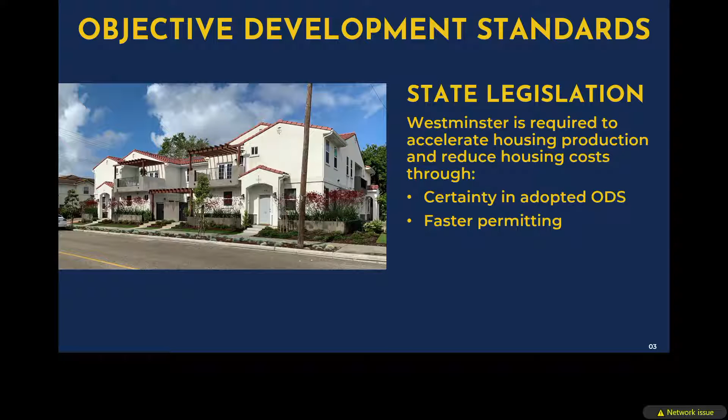That is, provide what we call certainty in adopted ODS, essentially identifying the rules of the game, so the developer, the community, the residents all know what is expected from a development submittal. Then the other part of this is faster permitting. Often the process takes a long time, so are there things that could be done to cut the permitting period so you get more housing quicker?

So the next question is, why do we need objective development standards? Well, the problem is today there is nothing to evaluate projects in an objective way. So what the city has today is a series of subjective design guidelines or just a limited amount of code.

That is very, very ambiguous. It is recommendations, it's discretionary. You can do this, you might want to do that. But it isn't something that has the force of law. And as a result of that, that subjectivity often results in inconsistent interpretations because it's a he said, she said, my idea, your idea, I don't know, let's talk about it. So it becomes very much an iterative process, and as a result of that, prolongs the process.

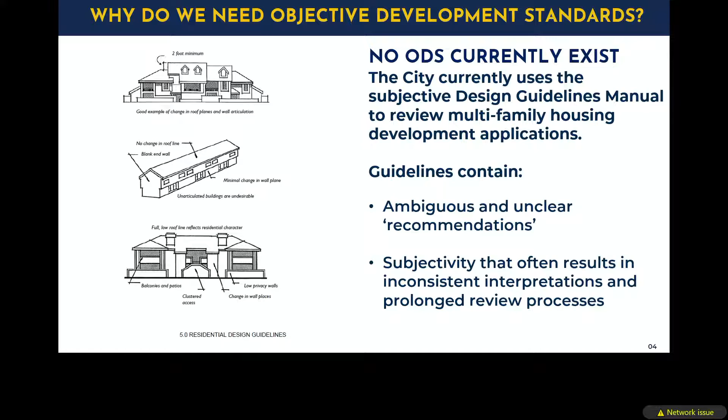So we want to get away from recommendations and subjectivity and create development standards that are objective, that offer no gray area. It's black and white. Either you do it or you don't. And these requirements are shalls and musts, and they need to be measurable and verifiable. So there are dimensions, heights, width, colors, materials, those sorts of things. And the idea here is not to layer more regulations, but to distill this down to the fundamental things that are required, and then allow some flexibility where it doesn't matter. Because just adding more and more regulation doesn't make anything better. So we need to find what are the essential things you want to regulate, and allow flexibility for everything else.

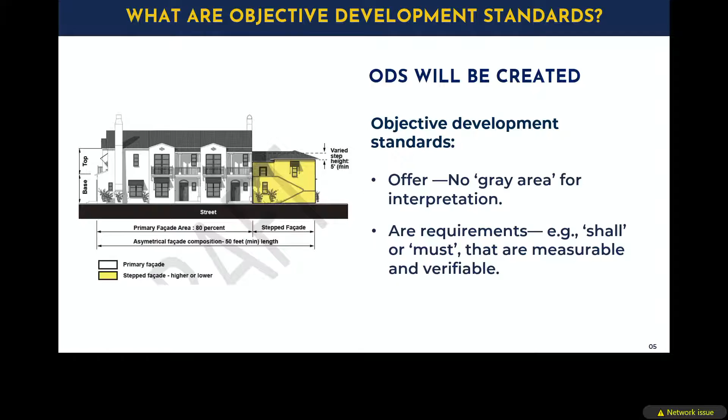All right, so where will these standards apply? Well, first of all, it's not going to apply to single-family homes, residential development that is already there. It's not a remodel project, it's for new development only. So if it's a new project in the MU, which is mixed use 36, and MU 40, mixed use zone parcels, and those are mostly along your major corridors, Beach Boulevard, Westminster Boulevard, Trask, the other bigger roadways. So that's where most of that is targeted.

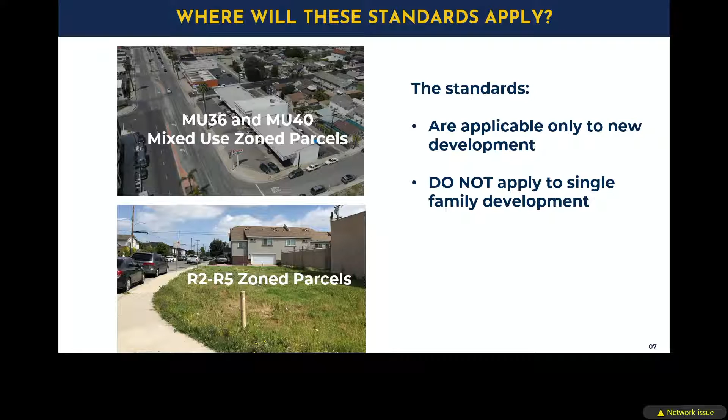And then there's also standards that are going to apply to your R2, 3, 4, and 5 zones. So those are your townhomes, condominiums, and maybe some small apartments that are mostly infill into your neighborhoods. There might be some as part of the corridors, but generally they are in the neighborhoods, all right? And so what we want to make sure is those in particular are good neighbors, so that they take into consideration the context that they have along those residential streets.

So what are the benefits? There are good things that come out of this. For the developers, the development application review process will be streamlined. As we said before, we're going to cut that back. And as a result of that, because we're architects and we work with developers, we know that when we sign a contract, one of the things we have to figure out is what's our fee. And if there's no certainty, our tendency is to charge more, simply because we got to build in this redundancy of meeting again and again because we don't want to lose money. So that, as a result, increases the cost of housing, because they'll pass that on, the developer will pass that on to the project. And so that money saved with the reduced processing time will be helpful.

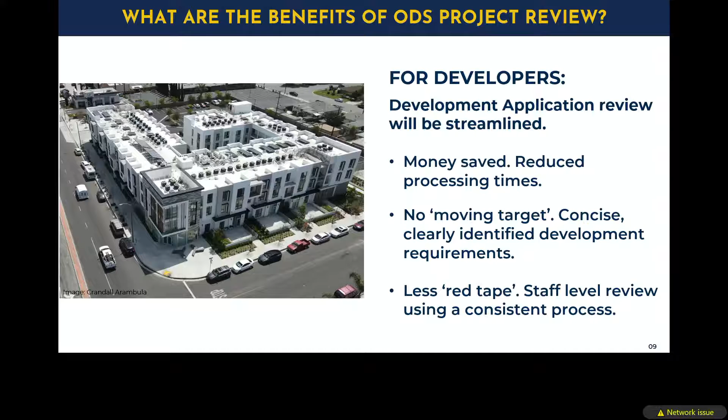The other one is there's no moving target. So if I'm an architect and I represented my builder or my developer, I know what those standards are and they're clear, concise, and easy to understand. So I know what to do and what to respond to. And finally, as we said before, there's less red tape. And because this development process will be done at a staff level, it won't be done by the Planning Commission, it won't be done by City Council. And this is by mandate from state law.

All right, so what do the residents get out of this? Well, first of all, the biggest benefit, you're going to have more housing choices, and that is a fabulous thing to do. And because you're involved in the process, you have the chance to weigh in on what the values of design should be. So you get the predictability of design that are based on the community's values. They're not imported from Portland or Pittsburgh or some other place. They reflect what the residents of Westminster want.

And then there are other small things, like we call public accessible amenities. Wider sidewalks, more street trees, more benches, better lighting, and other things like that that might be part of the development as part of the standards.

Because we have a lot of mixed-use development, we want to set the stage so that the development, if it has a shop and an office building, is economically viable. What we find is a lot of development standards aren't. The requirement for things like ground floor commercial doesn't work, and they end up being what we call a ghost box—retail spaces that no developer can fill, and become a blight.

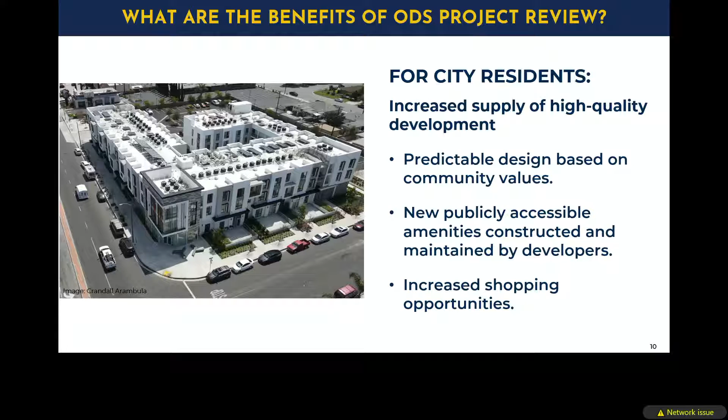So we don't want to see that kind of thing. We want to be very cautious about the mixed-use areas, only locating and requiring it where it will work. All right, enough of that—let's get into the meat of this. So we've got to create the ODS. What goes into that objective design and development standards?

So here we are, providing input—we're really the beginning step. On the left, you see we've got a contract that started a year ago. Most of this was gathering information, evaluating existing regulations, getting a better sense of the lay of the land. We've met periodically with Alice and Steve and staff to get a better sense of what you have in your code and your design guidelines.

Once we get into this middle part, which is creating the ODS—what we're talking about today—we've met with the development review team, who gave us input on March 15th and April 1st, and then we're going to have a series of public meetings.

So we're having this meeting tonight. And we know on June 17th a lot of people can't make it on a weeknight, so we're going to have another meeting, and we invite everybody to come again. There's nothing wrong with chiming in twice into a community meeting. That one will be 2:30 to 4:30 on June 17th.

We're also going to have some invited stakeholders—people who have a property or may express interest, a developer, an architect, others who are actually going to go through the application process—and we want to talk a little bit about that as well, and also update them on what we've heard from the community.

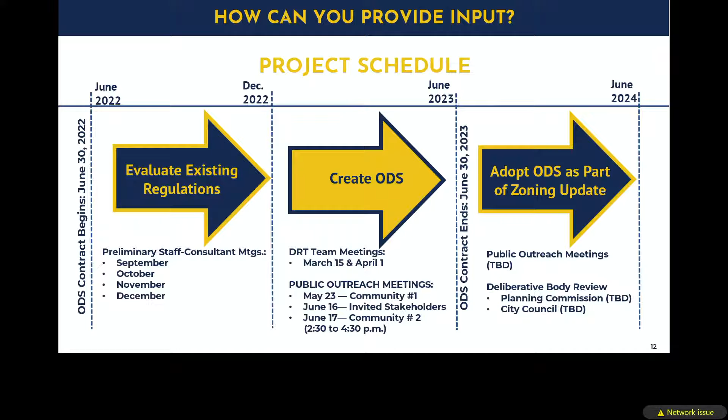The second piece is the site development—think of it as the placemat that, number three, the building goes on top of. So these are broken into three distinct areas with standards that regulate them: the edge, the mat, and the cup and saucer, if you will.

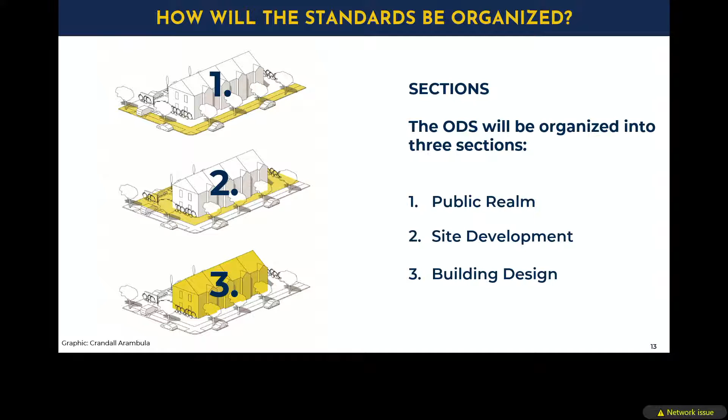Let's talk about those public realm improvements—this is generally what we're looking at. This is a street just off Westminster Boulevard, a side street. We're imagining, this is not definite, just for instance—if that site were to redevelop, we'd expect to see that perimeter, that collar, have these things: widened sidewalks, canopy street trees, shrubs and ground cover, ornamental pedestrian-oriented lights about 15 feet high, lighting the sidewalk, not the roadway—this is for pedestrians—benches, bike racks, and other street furniture, all the things that go along with that.

What we are anticipating, because we want wider sidewalks, is that the current standards for the city—the sidewalk—are very narrow, and frankly, it's substandard.

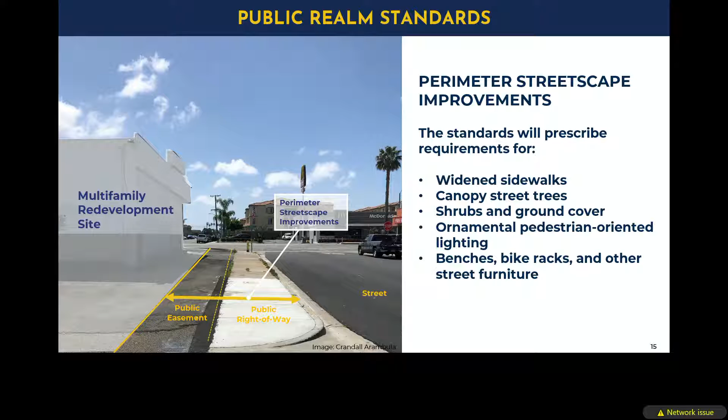So we're going to ask the developers to allow this area for perimeter landscaping improvements. In turn, because we're taking some possible development area out of this through the rezoning process, we want to revisit setbacks so the developers have a larger envelope, so the setbacks are less to take into account. We'll show you some examples of how that might occur.

So let's talk about why it's important to think about the public realm issue. Because this is about multifamily development, and we find the people who are living in multifamily development, not only in Westminster but around the country, are people who may not own a car, may be transit dependent, may be handicapped, elderly, or children.

You want them to have the ability to walk to a grocery store, to school, to their job, and not fight with everybody else to find a parking space wherever they're going. They need this. So this is about equity and providing safe walking and rolling access, which is lacking.

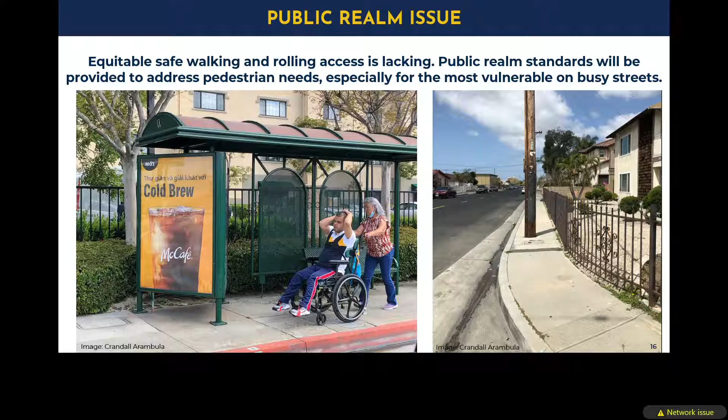The public realm standards will address these fundamental needs that people have. The conditions that we have are not doing that, especially on your major corridors.

And then when we look into the analysis of your neighborhood, you've got a lot of gaps in the network today. There's nothing worse than going by a development and having to walk through a lawn, or if you're handicapped, getting to a corner and not having the ability to cross the street or continue, having to take that wheelchair into the street.

That is not equitable. You would never design a roadway with these conditions. So we need to rethink how we approach that area, so that we're creating safe, direct, and convenient neighborhood sidewalk networks that work for all ages.

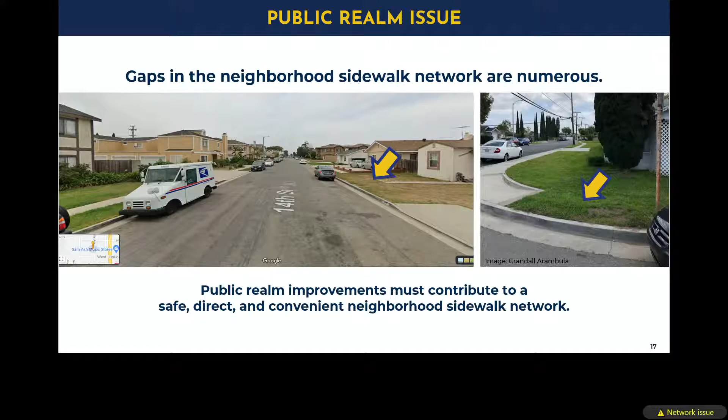It's okay to send your 8-year-old to the grocery store to pick something up. It's okay for your grandparents to get out and get some exercise. These aren't the conditions today that you can have. And incrementally, as you get development, we want to see development start addressing these things.

The other thing we have to deal with is that you've got very wide roadway corridors, often controlled by Caltrans, and they're essentially highways. When we've got 6 or 7 lanes, that is a pretty tough environment.

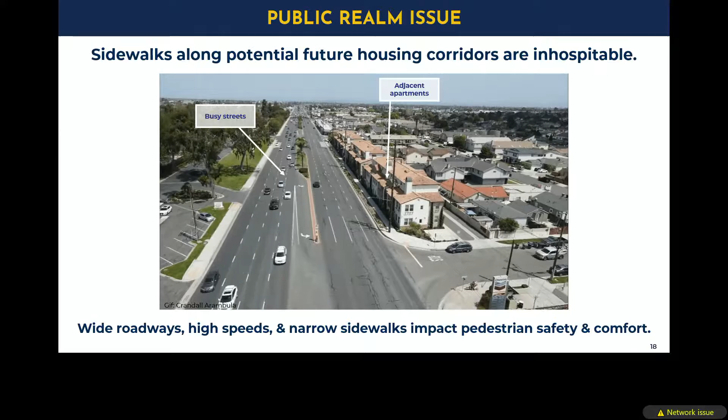So what we want to think about is not so much from the point of view behind a steering wheel, but as somebody walking along these corridors. We want to think about what conditions would make you feel more comfortable in these high traffic conditions. Luckily, you've got some good examples already being built.

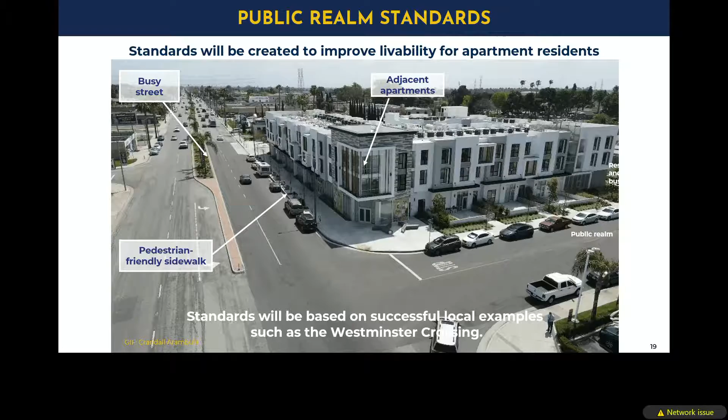You've got this wonderful project on Westminster Avenue called Westminster Crossing. It's an award-winning project, as I understand, and it's done a lot of the things we would call good design. You see here there's adjacent apartments, a busy street, and what they've developed is pedestrian-friendly sidewalks.

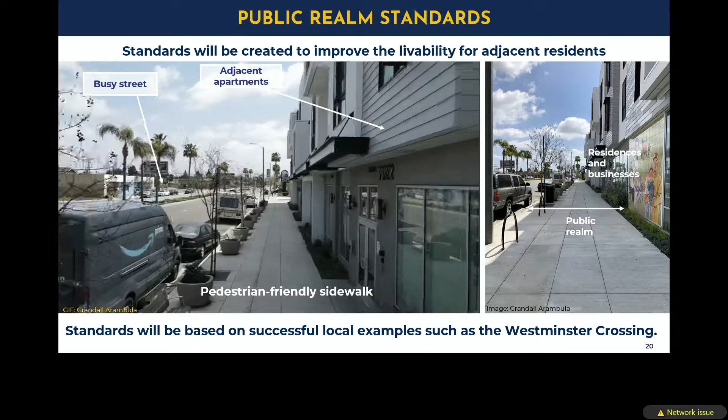When we think about the pedestrian-friendly sidewalk, we're thinking from that curb line to the building edge. We want adequate area for a wide sidewalk. We want to see, again and again, street trees, benches, planters, landscaping - all those things that make it pedestrian friendly.

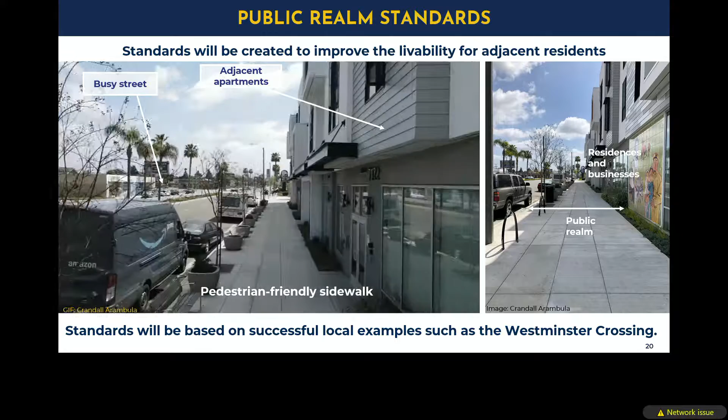Even in better conditions, it would be even better if you had parked cars too, because that creates a barrier. When you've got 50,000 or 60,000 cars a day, that separation creates that comfort and convenience for people.

All right, so that's one thing we want to think about - those are your busy streets. And then on your neighborhood streets, we want to think about connectivity and access into development. So again, we want a landscape buffer.

Maybe the sidewalk gets a little bit narrower. And then you see these townhomes - we want to have good access to front doors. That is the kind of development scheme that we want. And then we want to create zones: a parkway where the landscaping goes, sidewalk standards, and what we call a transition area.

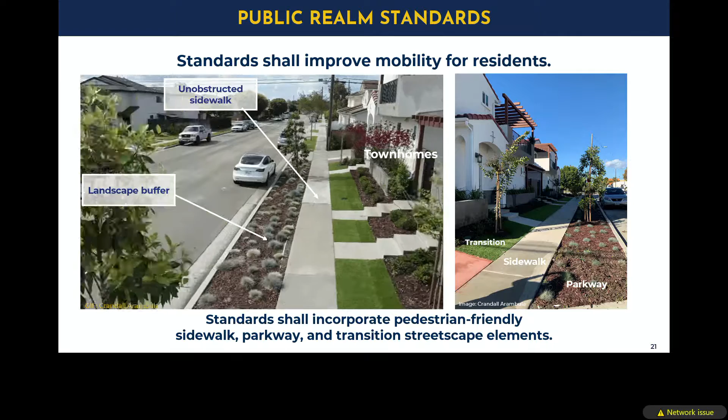That little bit of greenway that separates the building and the development from the sidewalk, so you've got a buffer on both sides. So what do you want to do today? Is it okay, the conditions that you have today?

The standards shall improve mobility. Mobility is another planner word meaning the ease of walking and access for residents, so we want to be able to get from point A to point B. That's what mobility is.

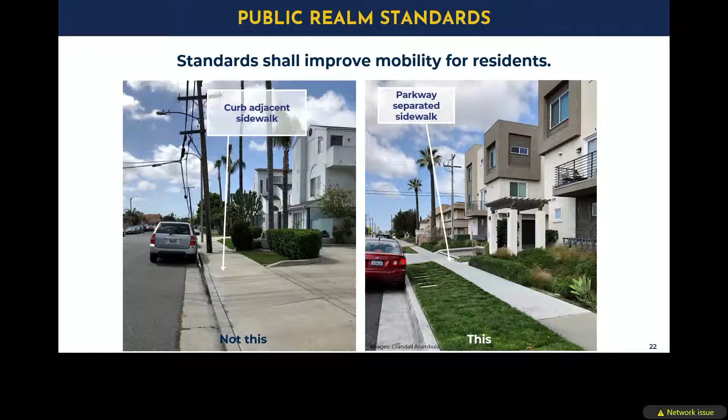Based on those images you saw before, we'd prefer not to have what's currently typically everywhere, which is a curb-adjacent sidewalk. The problem is curb space is a precious commodity. It's where you get telephone poles, traffic control boxes, signs, all kinds of infrastructure serving the roadway. So it's a push and shove between all of those things. If you can push the sidewalk away from that, you don't get obstructions like you see here.

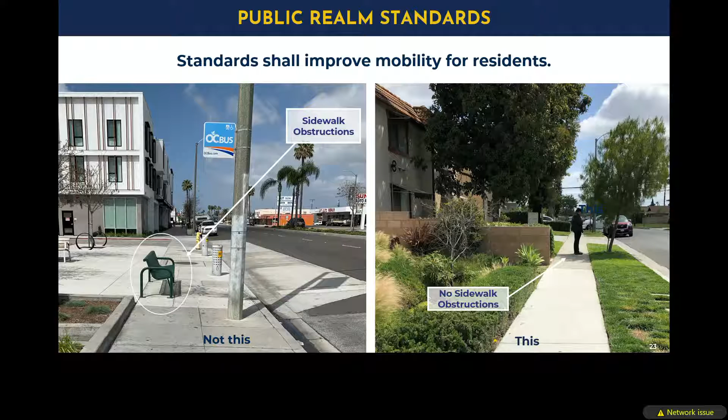So even the best-intended conditions are not well designed. The bus put a bench right in the middle of the sidewalk without thinking - that's great if you're riding a bus, but imagine if you're blind walking along this sidewalk. The amount of landmines you'd have to navigate is incomprehensible. So we want standards that say no, you cannot do that, and instead do what's on the right: no obstructions. That sidewalk has to be free and clear.

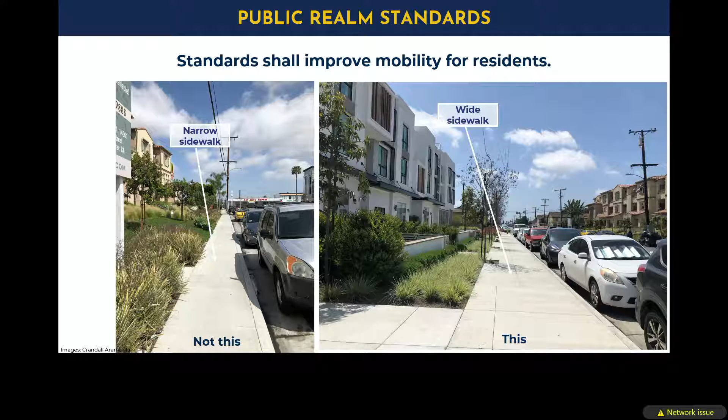Then we want adequate width. The city's current standards call for a 6-foot sidewalk generally, though there may be some wiggle room. As you can see, that's okay to get out of your car door, but it doesn't create a welcoming environment. What we'd prefer is the ability to either pave or put landscaping adjacent to that car zone, but have a wider sidewalk so people can walk side by side, with somebody coming the other way. So it's not a substandard way of designing the sidewalk - a little more width, an adequate amount, not overdoing it.

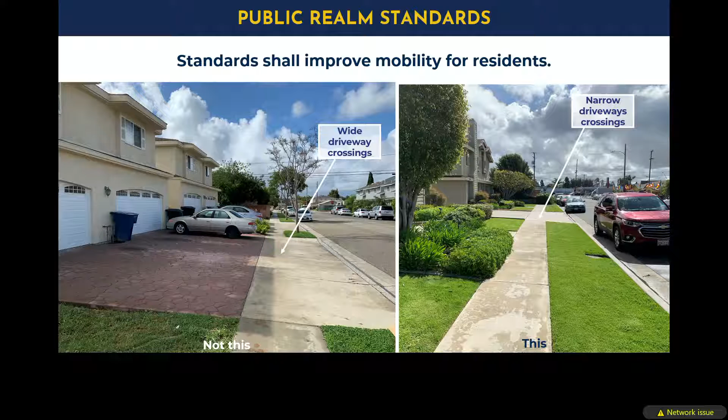The other thing to think about is obstructions for people walking along the street - things fundamental to a development, like a driveway, and the condition it creates. As I know from always looking behind me when I put my car in reverse, wondering if someone's back there - inevitably, the more of those danger points you create along a width, the more accidents will happen. So we want to minimize those crossings for driveways, recognizing you still need access. Those are some considerations in terms of the public realm.

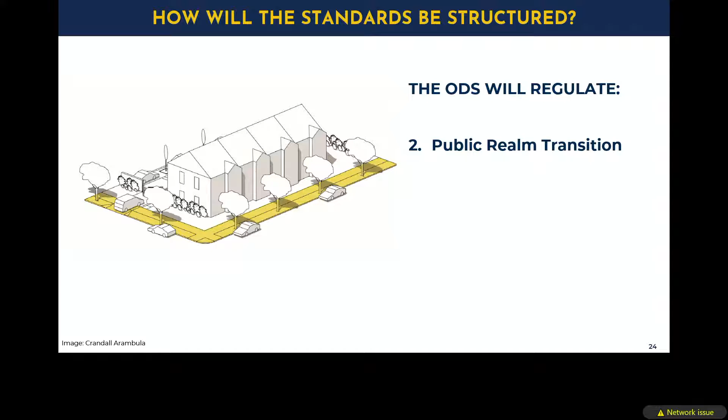The second piece is what we call the public realm transition between the development site and that collar around the edge. The standards here deal with where you see that dashed line - that's the building face. We want to concentrate on the first floor in particular, so we don't necessarily need to regulate the whole facade.

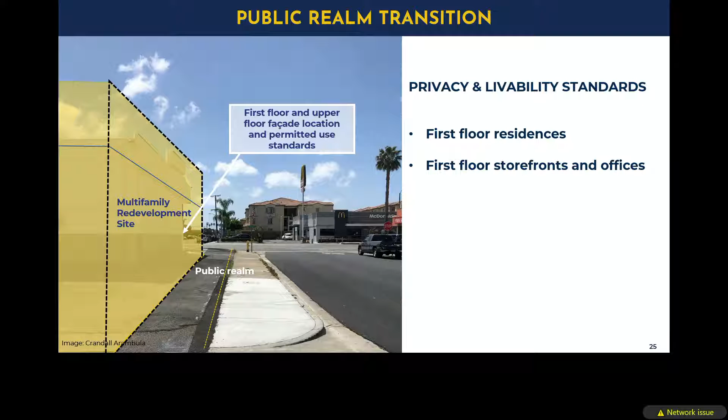In particular, we want standards dealing with privacy, because people are living in ground floor units, and livability. Remember that busy street - we're going to talk about that again. I don't want to be critical of this development, because I think it's wonderful, a real positive, since you're getting development here.

But the design of this development was really in response to the conditions - you see the amount of traffic here. What you'd prefer in a development, and typically you'd have standards asking for balconies, terraces, and patios. But in a condition like this, with that noise and air pollution, how many people would actually use a balcony or terrace here? Probably not many, simply because it's what we'd call hostile. So we want to make sure we avoid requiring things that won't work on a corridor like that.

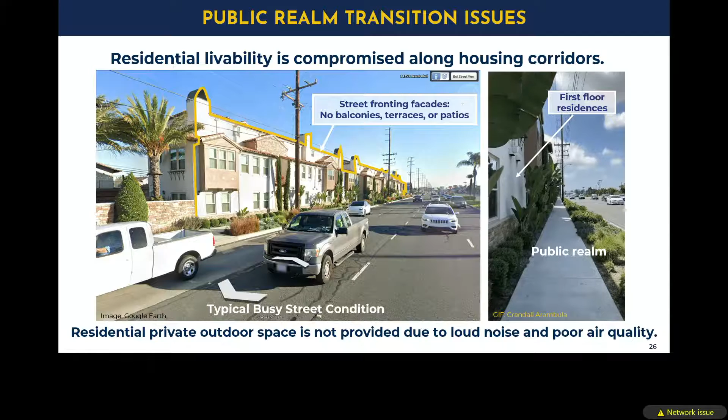The other thing is we want to think about safety, what we call eyes on the street. Typically you want buildings to either turn a shoulder or face the street. In this case, because of the traffic conditions, they've turned their back to the street, so the entries are on the other side of the building.

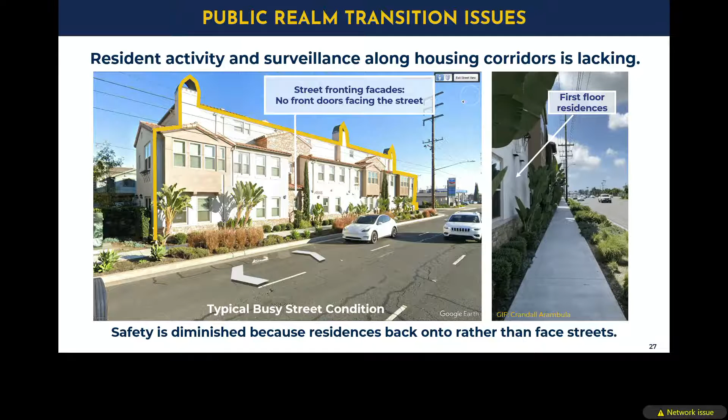If we want to activate the sidewalks and shorten the distance to a shopping center, a job, or a school, people have to circle around the development. And there are no front doors here, and no eyes on the street either. That's a safety issue, a surveillance issue.

Picture this: most units, when you go into a residence, you go through the living room and out back is a bedroom. So if the front door is on the other side, the living room is there. We validated this by looking at the floor plans. This building has all the bedrooms along this edge, and that sidewalk is literally within 4 feet at grade. If I lived here, I wouldn't leave my windows open, I'd have the blinds down all the time. That impacts the livability for those residents at the ground floor.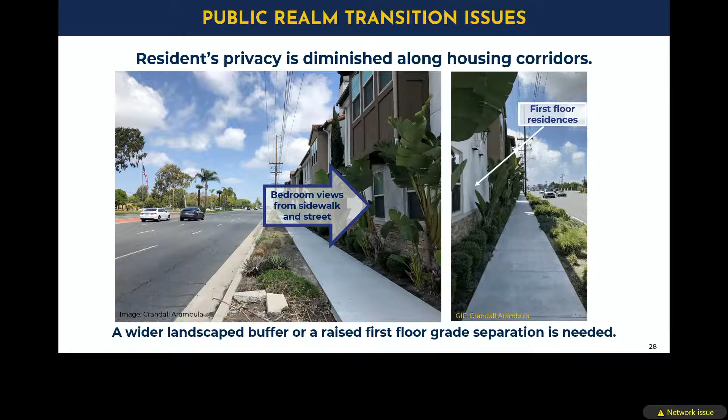So we need to develop standards that can address these issues, because these aren't good conditions. They're not creating the kind of places that people want to live. So what can we do? I'm going to give you some examples of what standards could do.

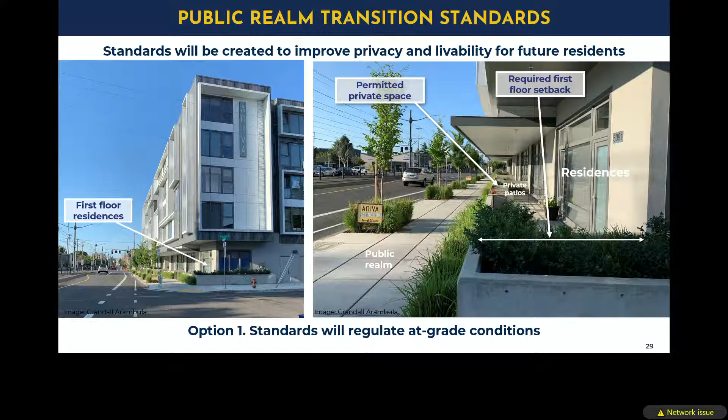This example is on a very similar busy street. What we're saying is we need to push that first floor back. The upper floor of the building actually goes right up to the sidewalk line, so the developer maintains that envelope of developable area you saw before. But you've got the setback, then landscaping, a wall, and maybe—if traffic is lower—patios at the ground floor. We'll allow that, not require it, in these kinds of conditions on busy streets.

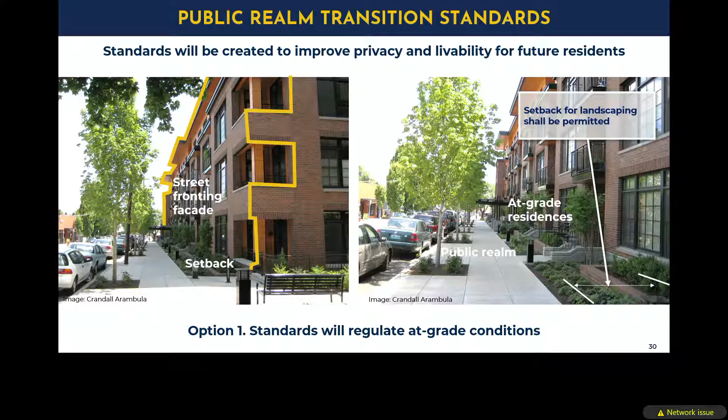That doesn't mean you have to do patios—it could simply be landscaping, like you see here. So it's about distance. What's the right amount? If I'm walking on that sidewalk, compared to what we saw on the Beach Boulevard example, it's further away. That separation gives enough distance so people aren't peering into front doors.

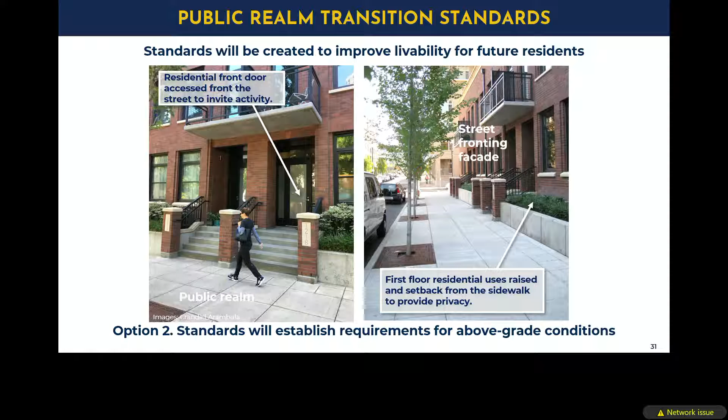Another way to do this is with grade separation. The idea is you could do some landscaping and raise the grade of the first floor. By regulation, in certain instances, an option could be either landscaping or raising the first floor. Once you do that, you get wonderful opportunities, like front doors accessed from stoops, as in the example on the left.

Another option is to actually build the building right up to the property line—engage it, but raise it. What you see here is an example; see the woman walking with a dog. By raising the window and door high enough, I'd leave my windows open all the time because I'd know nobody's going to be peering in. That's a condition we can allow, which gives the developer the ability, if they choose, to maximize the development envelope so we can get more housing.

There are certain conditions we're going to require you to meet, but we want to give as much flexibility as possible—not dictate one option, but offer three, so the developer and architect have some ability to use creativity.

Let's talk about site development—again, that placemat the building goes onto. These standards will apply to both the mixed use 36 and mixed use 40, and the R2 through 5 zone lots. These are fairly generic standards. One key principle: regulate what matters and leave flexibility where we don't. These standards need to be concise—we do not want to regulate every last inch of the development site, only the things that matter.

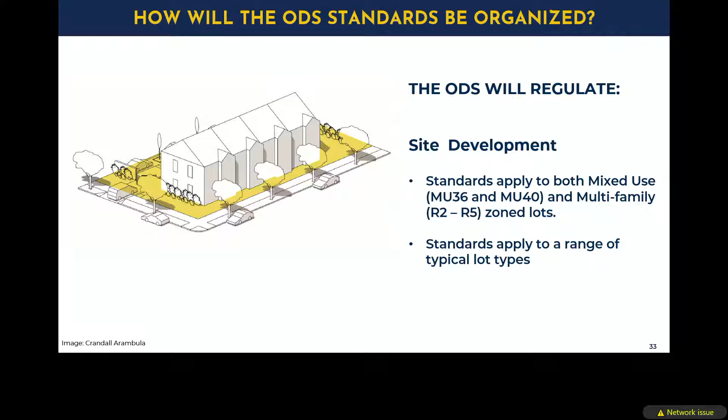We also need to think about the range of development conditions across the city. It can't be one-size-fits-all, because you have corner lots, mid-block lots, and lots served by alleys. We need to take that into consideration as we make site development standards.

Some of the things we want to think about are off-street parking and regulating things that matter, like parking access. How many points of access do you get? What's the character of that driveway, in consideration of things like fire apparatus and emergency access, which will also be regulated by others.

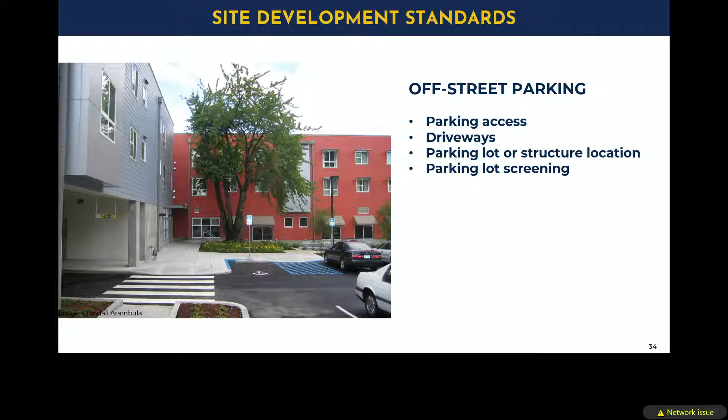And parking lot and structure location - where do you put that? Those needed facilities, and then once you've got them, is there a need to screen them? So the standards will look at those sorts of things.

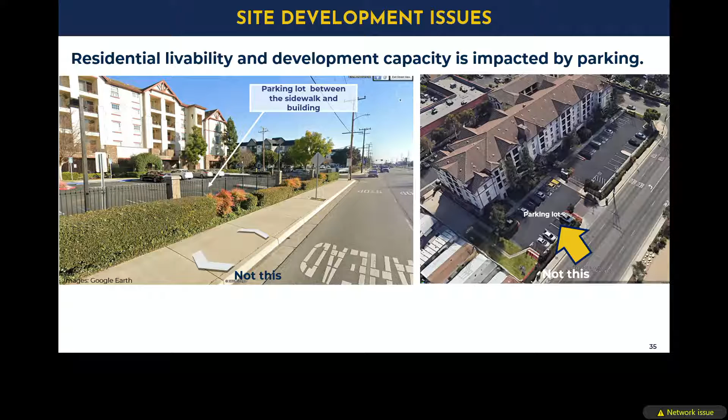Some of the conditions we want to avoid are those affecting livability. Generally, we don't want to see parking lots between the building and the street, because that creates a condition where people have to walk through parking lots. Frankly, it's not the kind of condition where you want to be featuring parking instead of the livability of development.

The other thing we want to think about is garage doors. We'd prefer not to see garage doors on the frontages, because that could be occupied space, and we'd prefer the garage doors to be on the side or back sides of buildings. Can this happen? Knowing that we've got some lot conditions, this may be a bit of a challenge, so this is something we're looking at standards for. As we start looking at setbacks and other things, we may be able to create a condition where this becomes viable.

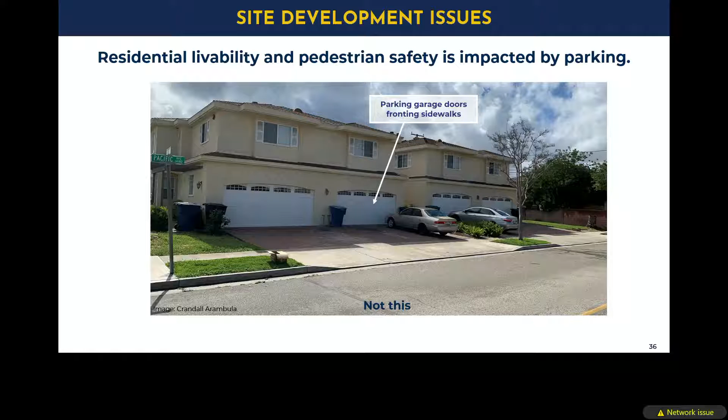And then once you've got that parking, where it's along busy streets or pedestrian routes, add some screening by fences, walls, and landscaping - could be a combination of those three - but we need to get the car out back and behind.

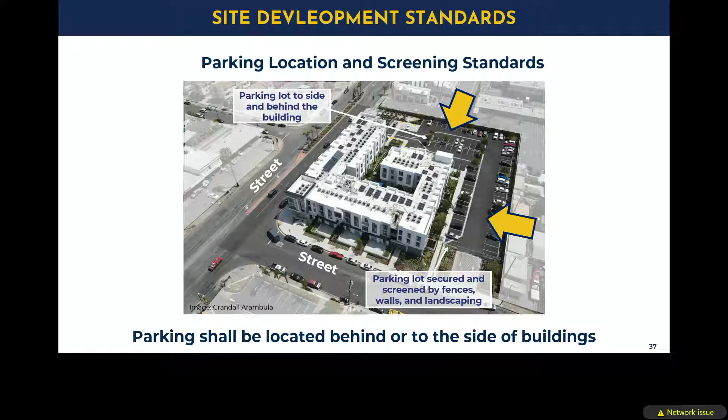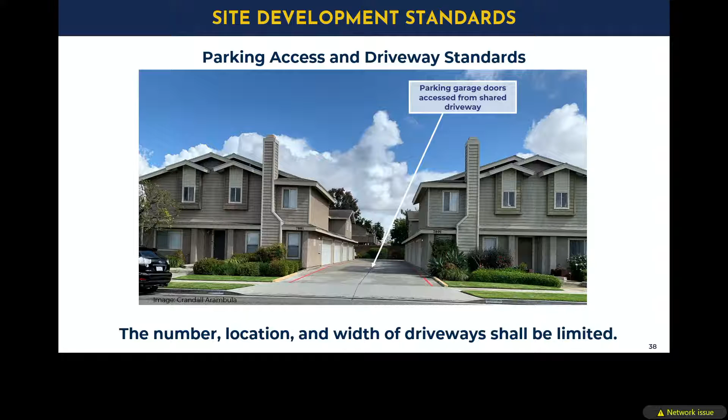We'd also have some standards for the driveway. We want to keep that as narrow as possible while meeting fire access standards, and really encourage things like a shared driveway. This happens to be one single development site, but imagine these two buildings were owned by two different entities - we'd like to engage those developers to engage their neighbor and say, can we share a driveway? So we have half as much pavement and fewer driveways, so we have fewer crossings, for example, than we saw in the previous standards.

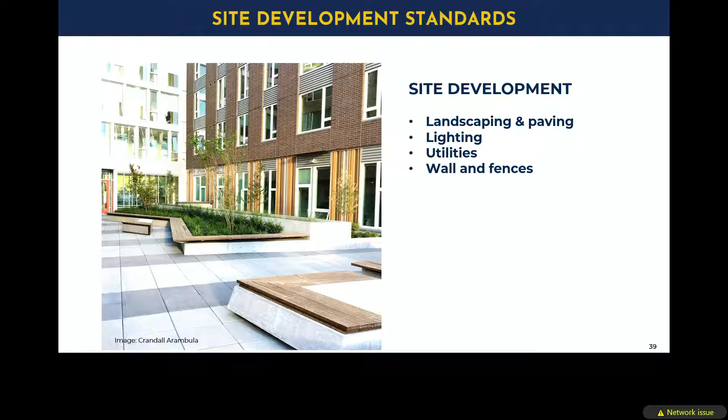We want to think about some basic standards for landscaping, pavement, lighting, utilities, walls, and fences. That list will be fairly minor, so I'll just skim over it, but there will be standards addressing the amount of lumens and lights, the types of landscaping permitted, and the percentages required. They're pretty standard things, but again, we don't want to overkill on these standards.

Moving on, this is the last one, so I appreciate your patience as I go through this. Now we talk about building design. This one gets pretty tricky, because the one thing we do not want to do is prescribe a certain type of architecture. We want to show you some examples that do show architecture, but we want to distill the fundamental elements of those buildings into standards, so people have a better understanding of what the standards are.

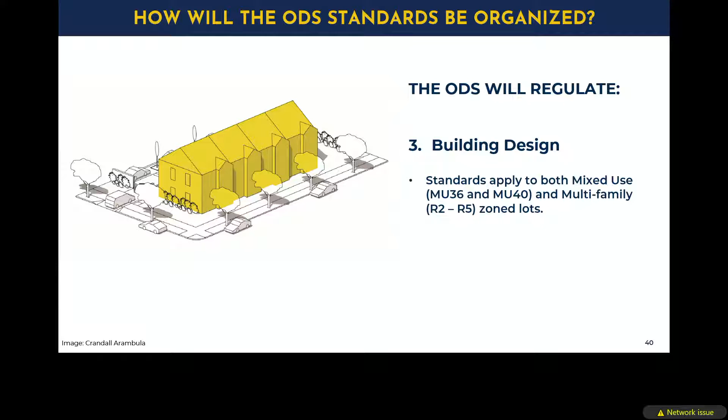We're going to use types of buildings that are pretty common to Westminster. The standards are going to address building form and scale. Think of form as a piece of putty, a piece of clay - we're going to form it and scale it, two ways, vertically and horizontally. The standards are going to really define that kind of forming we're going to do.

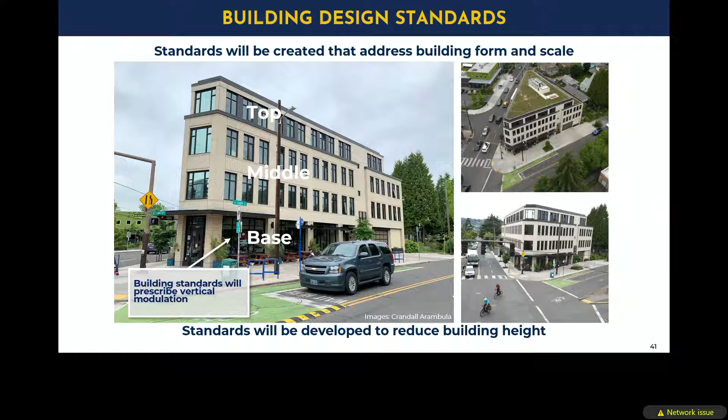So you see an example of how that's done. The other way we want to modulate that building is not only up and down, but in and out. We want the building to project or recess.

So this is a standard that we want. And we also don't want to overregulate this. We don't want to get to the point where we're getting fussy and requiring things like balconies, a certain size of bays, and other things like that. We want bold strokes in the form and mass of the building. And then it's the discretion of the architect and developer to determine how they'd add additional articulation.

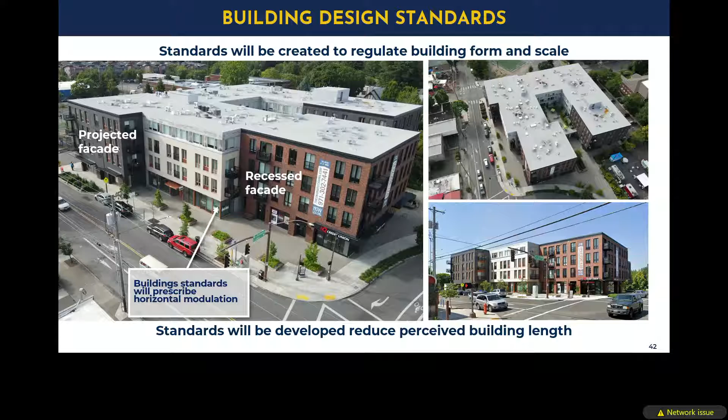There are going to be some standards in terms of regulating materials, colors, windows, and doors. This is intended to make sure that the buildings are durable, long-lasting, and also in character with this environment. So those are really the ideas that we want to have with that. We will have some standards that talk about that.

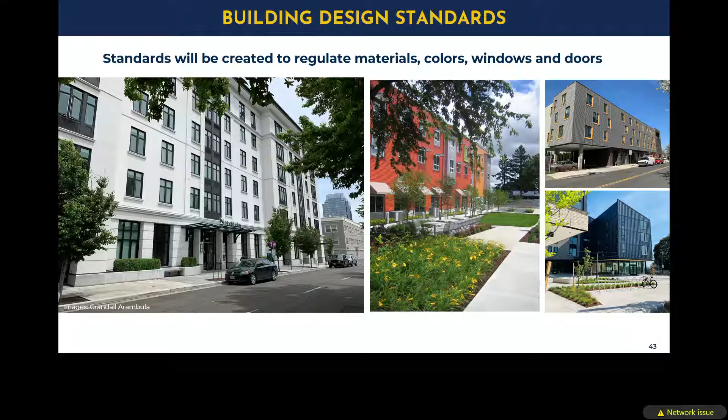With that, we do know these sorts of things have an impact on developability - the ability to develop a building - that could raise costs if we're not careful. So we want to make sure that we're allowing types of finishes that are realistic for affordable housing projects.

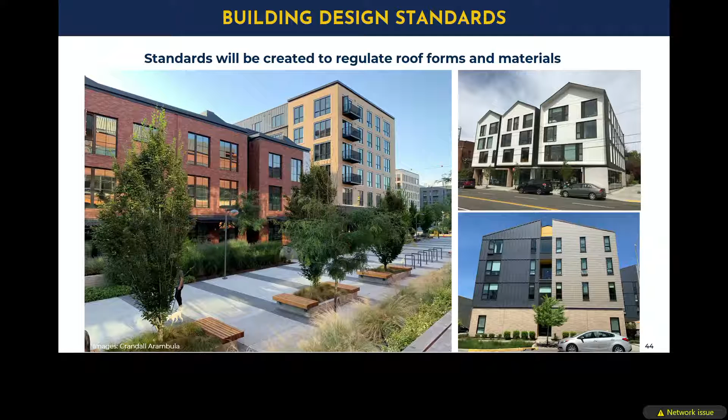The standards are also going to look at roof forms, because we want to be able to regulate that. We want to see some flexibility, so not every building has a flat roof, frankly. We'd like to see a little bit more creativity, maybe sloped roofs. So if that's something you'd like, chime in on that. We think just a little bit of variation gives the ability to create more scale that might be more compatible, especially adjacent to residential areas on the corridors.

All right, so that's the presentation. If you've got any clarifications, raise your hand. Jonathan over here has got a microphone, he's going to hold it, so if you've got a question, raise your hand. Question or clarification, specifically about the ODS and the process.

Hi, I just wonder, can you tell me the actual bill number - was there one bill from the state that said you can no longer do subjective standards? Yeah, so there's a series of these. Senate Bill 330, which the state has required, and there's also Senate Bill 35. Those are the two key ones right now. There's a whole series of other ones like that, and I can talk to you about those afterwards, okay? But those are the two that are regulating right now, and there may be some additional regulation that follows up this summer as well. But those two really are requiring that the ODS and an approval process be streamlined.

And when did they pass? The first one passed in about 2015, 2016 - that's SB 330 - and 35 in about 2020, 21 during COVID. So they've been around, and what they're requiring is that every community across California have ODS - objective standards, guidelines, they're gone. It's not unique to Westminster. As I said, we're working in Newport Beach right now, we're working in Coachella Valley, we're working in other communities around Glendale. I'm doing a lot of these here in California right now. So they're all doing it.